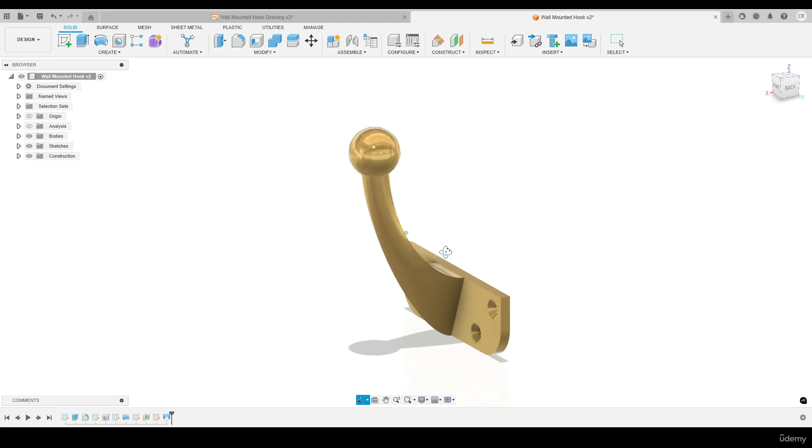In this exercise, we will model this wall-mounted hook. For the base plate, the sheet metal part, that's very simple, basic extrusion. We can use the hole tool for these countersunks. The sphere on top, very simple, use the revolve tool. But the only difficulty is the arm, and for this we're going to be using the loft tool.

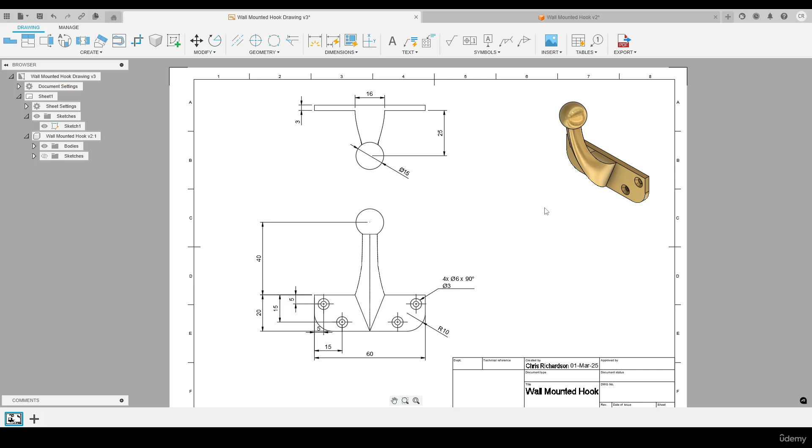If you want to have a go at modeling this part yourself, I've created a drawing for this with the dimensions here, so feel free to capture this and have a go yourself. But for the remainder of this lecture, I'm going to model up this part.

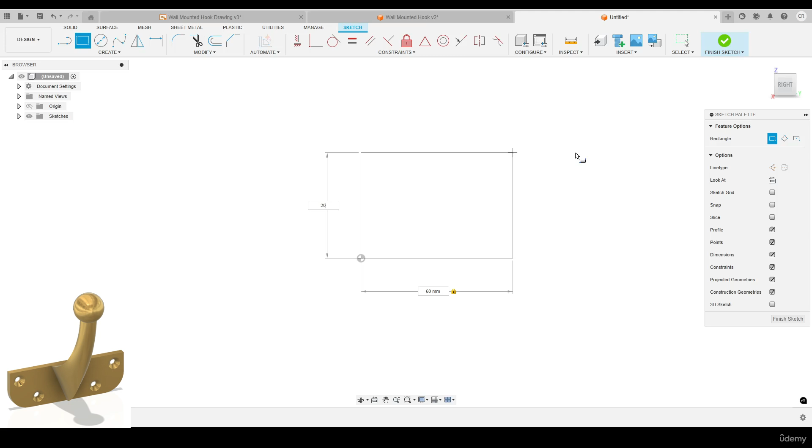Let's go on a new design. First we'll start off with the base plate. That's it, R on the keyboard, rectangle tool, and let's go for the YZ plane, that's the most logical for this part. Start at the origin and let's drag that out. Width of the part, we've got 60. Tab on the keyboard and the height, we've got 20. Just enter.

Let's go ahead, press E on the keyboard, let's extrude this. Let's come out in this direction - definitely not by that much, let's go for 3 mil. Press enter, and let's hit F on the keyboard.

Let's put in our fillets on this edge here, and we also want this edge here. Those fillets have a radius of 10. Okay, looking good. Just going to turn off the edges - visual style, shaded with edges.

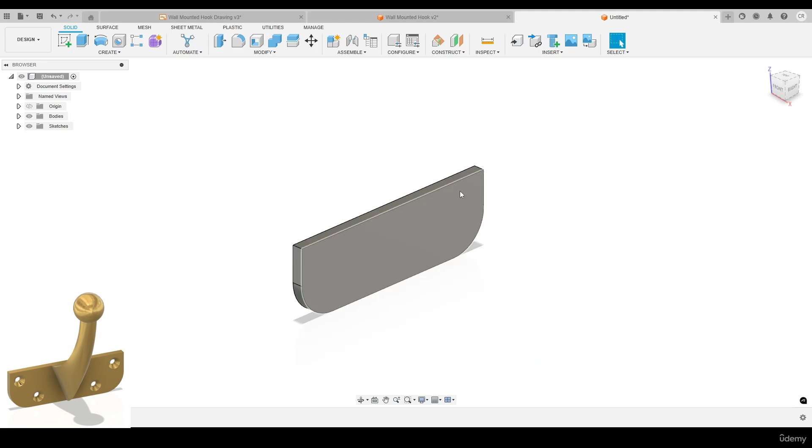Now let's go ahead and put in some points, and we use the hole command to put the countersunks in. So let's create a sketch and we'll do them on this face here. Let's come to create, point, and let's put in these roughly 1, 2, 3, 4, something like that. Use the horizontal constraint between these two and horizontal between these two as well.

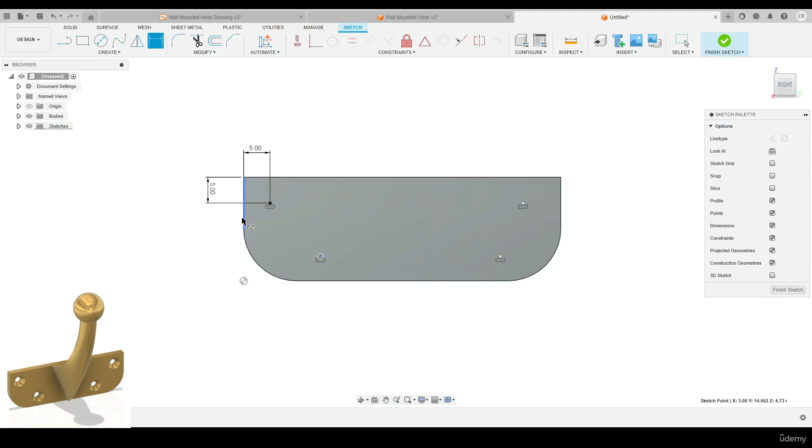Let's go ahead and press D on the keyboard. Let's come from the center point of the first hole to the top horizontal line, that's 5 mil. And then we've got the center point there to this line here, which is also 5 mil. And this one here to this one, 15. And this one from the top here is also 15.

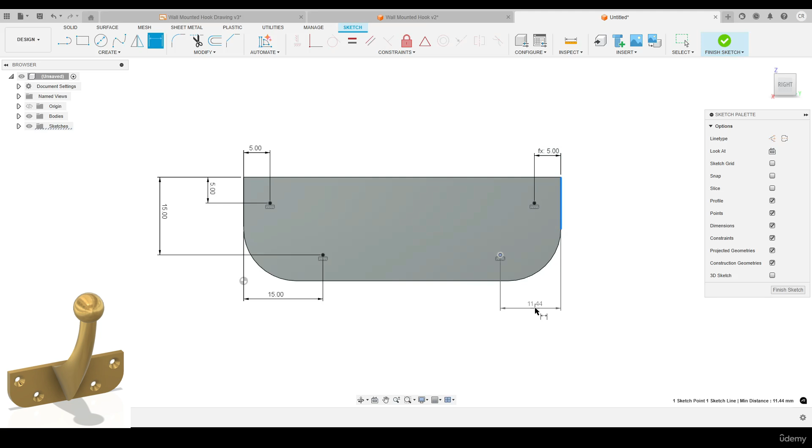Could mirror those across, but in this case I'm just going to add the one dimension. So instead of entering a value in the parameter box, I'm just going to select this dimension here, so if we do change it, that change will be reflected in the opposing one as well. Likewise, going to do the same for this guy. Select 15, enter, that's fully constrained.

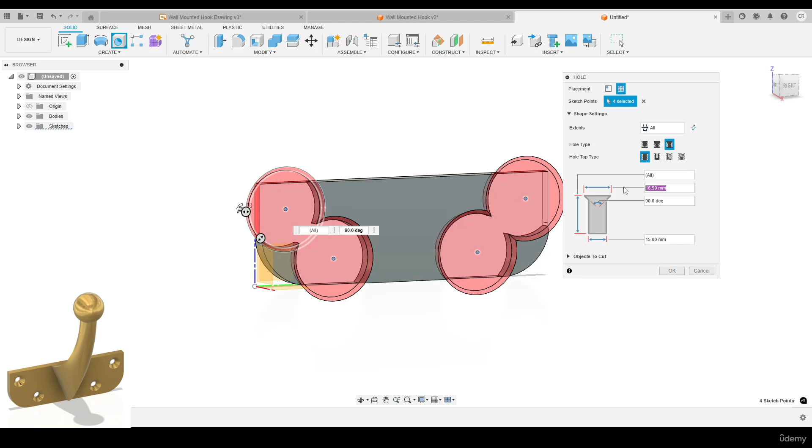Let's finish that sketch, use the hole tool and make sure we have multi-hole selected. Going in for 1, 2, 3, 4. Okay, those holes are particularly big. In terms of distance, we're definitely going through all. Want to go for a countersunk, and we just want a simple hole. So as per the drawing, we've got 4 holes, the countersunk is 6 mil, angle is 90, and the diameter of the hole is 3 mil. Press enter, that's looking pretty good.

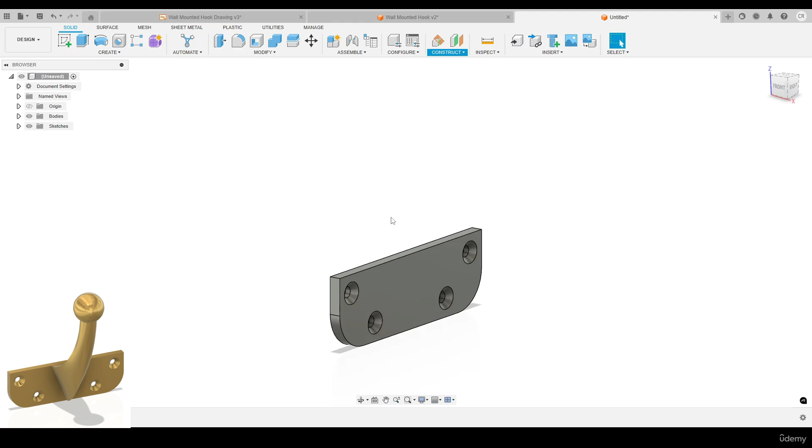Now let's go ahead and add in the sphere, which will be sitting somewhere up here. So we don't have a sketch plane up there currently, we're going to have to insert one. To do this, I'm going to select a mid plane between this face here and this face. Okay, I'm going to press OK there. Just bring this up roughly so we can see.

Looking good. Let's go for C on the keyboard, circle tool, and we'll select the plane that we drew. I'm just going to draw in the sphere here, so it's got a diameter of 15 mil.

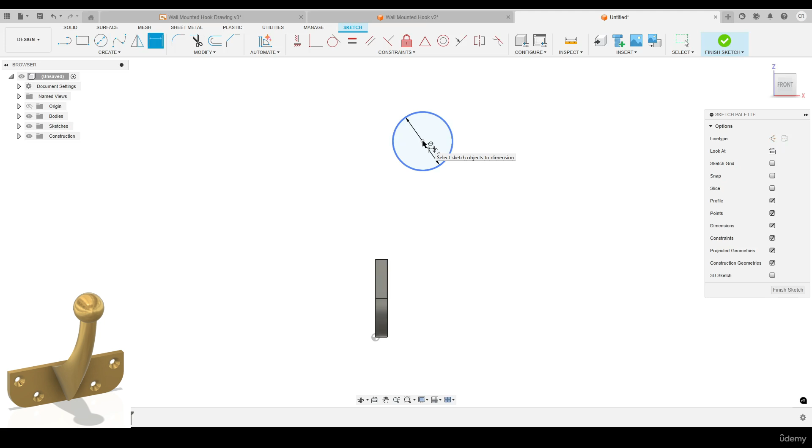Hit D on the keyboard and let's position this. So we know that the center point to this corner point here, that's got a dimension, it's 25. Then we've got a height of 40, and that's also from this corner point here, it's 40. Okay, it's looking nice.

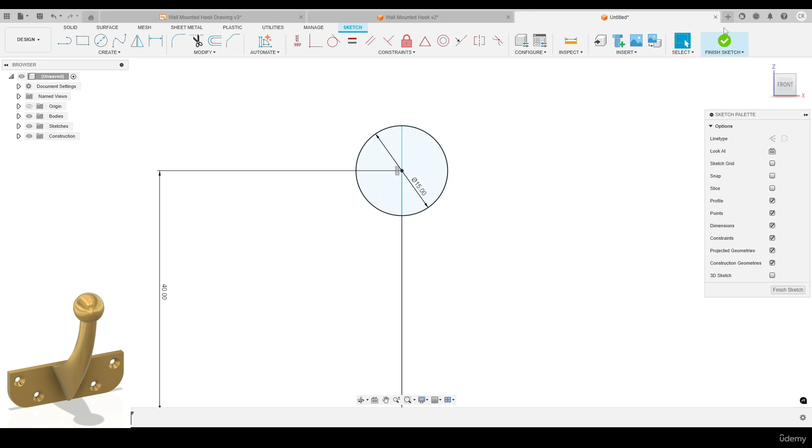Let's go for the line tool then, so we can select a revolution line. Okay, I'm going to put in a straight line there from the top quadrant. So let's finish that sketch. Let's go on the revolve tool, select one of these profiles here, and under the axis we'll select that line we drew in. Press OK.

So there we've got our sphere and our wall-mounted bracket. We just need to put in this arm, so I'm going to use the loft command for this. I need to draw 2 profiles, one on this face here, and then one somewhere within this sphere. So let's go for the line tool then.

Press L on the keyboard and we'll sketch on this face here. I'm just going to roughly draw in a triangle. Okay, something like that, and that should be a complete profile.

That's good. Let's go on the dimension tool between these 2 points here, and that's got a dimension of 16 mil. I want these 2 lines to be the same, so I'm going to use the equal constraint between these 2 lines.

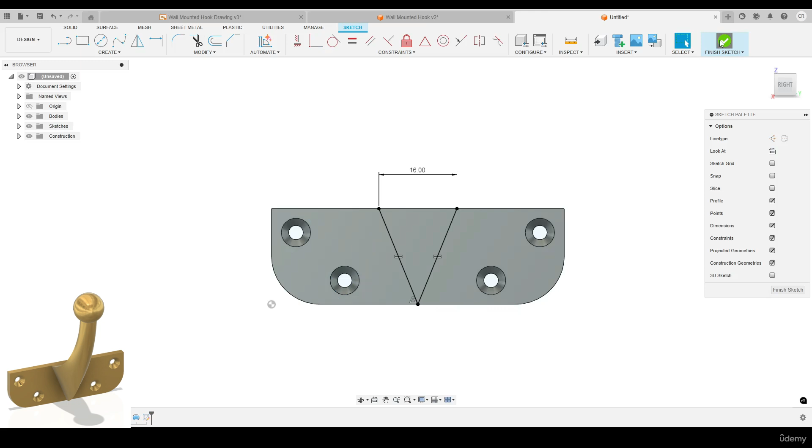That's looking nice, and now we just need to define where this goes, so let's use the coincident constraint, and this point here. If we can find the midpoint line by holding down Shift, it's just there. That's perfect, that's fully constrained. Let's finish that sketch, so that's one of our profiles there.

And then we just need to insert the other profile, which will be in the center here. So to do this, we need a plane to draw on in the center of this sphere.

So let's go and construct and offset a plane. Let's select this face here, we can bring that plane up, and that's got a distance as per the drawing. It's 40 mil, let's enter.

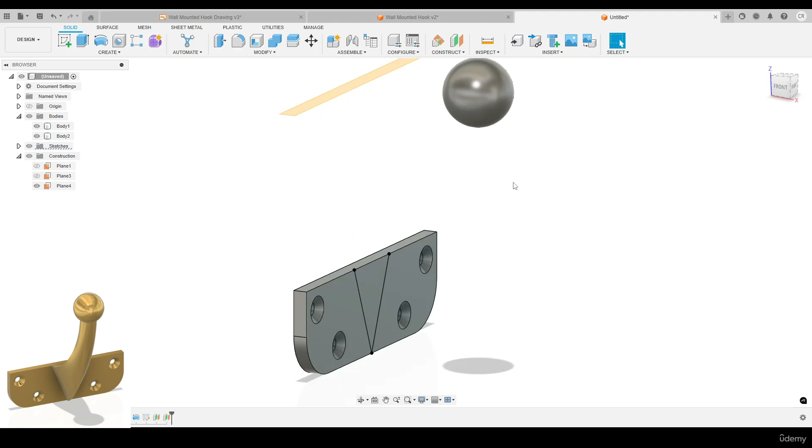Let's make sure that does intersect where we want it to. Go on the front view. Yeah, perfect. All right, let's get a sketch on this plane then.

So let's go and create sketch, let's select this plane here, and I want to project this sphere onto that plane. Let's hit P on the keyboard then.

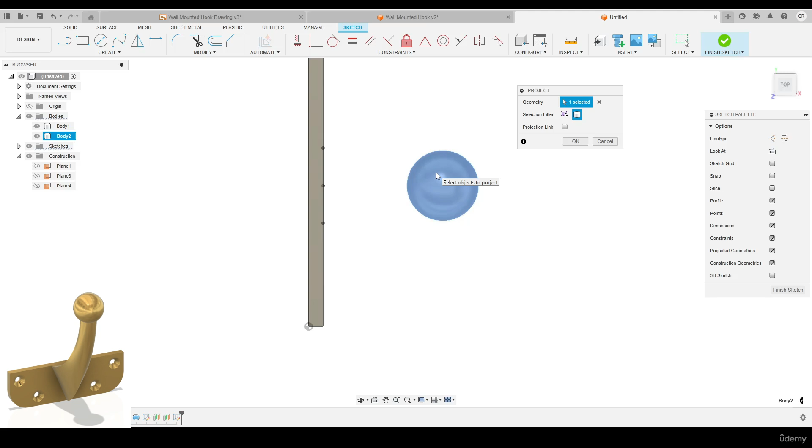In terms of geometry, we want to make sure here that we have body selected, because this is a different body from this one. We know that from the two bodies in the bodies folder. So make sure we have body selected, select this body here, press OK, and we should have a center point there, and also the exterior of the sphere has been projected. That's great, we can see it there.

Let's go for the circle tool then, and let's start at the center of this circle, and let's bring this out. I'm just going to go for 8 mil, but feel free to adjust this how you like, I just chose 8 mil. And that's going to be my profile in the center there, and this one here for the loft command.

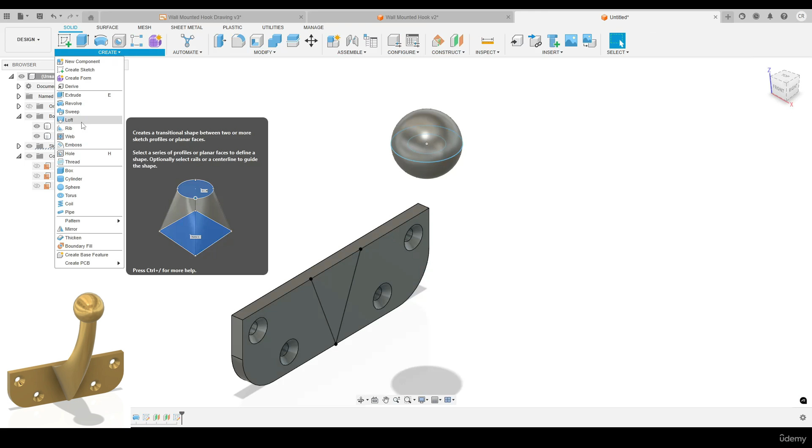Let's go and finish that sketch then. Let's see if this will work. Let's go and create loft. Okay, so we want to select 2 profiles here, let's go 1, let's go 2. All right, interesting, okay, so as in the preview, it's not exactly what we're after.

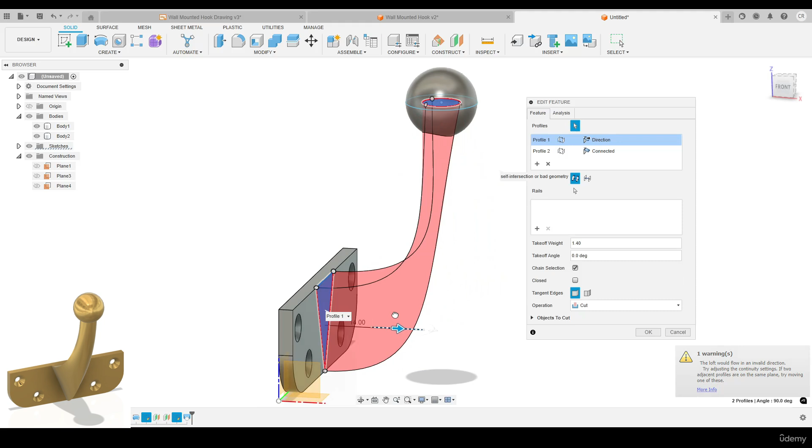So what we can do is just come up to our profiles here. I'm going to change the connected to direction, okay, and then we can adjust that. All right, so we can do something funky like this, I'm going to bring that out roughly like so.

Let's go with direction on the second profile as well. Okay, and actually that's looking quite good, but again you can adjust this how we like, so we can move it around. I'm going to go for 10 on the top, and then profile 1, got it as 8 at the minute.

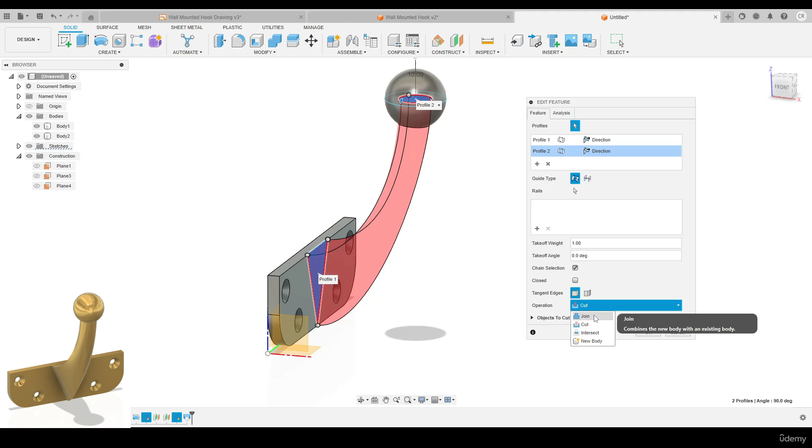Okay, so I'm quite happy with that preview, but right now it's doing a cutting operation, which is not what we want. So let's change that to, let's go for a join. Looking much better, let's press OK. I think that's come out quite nice.

And of course, let's apply an appearance to this. So press A on the keyboard, and for this I chose a brass. So let's go into metal, go into brass, and I went with brass polish.

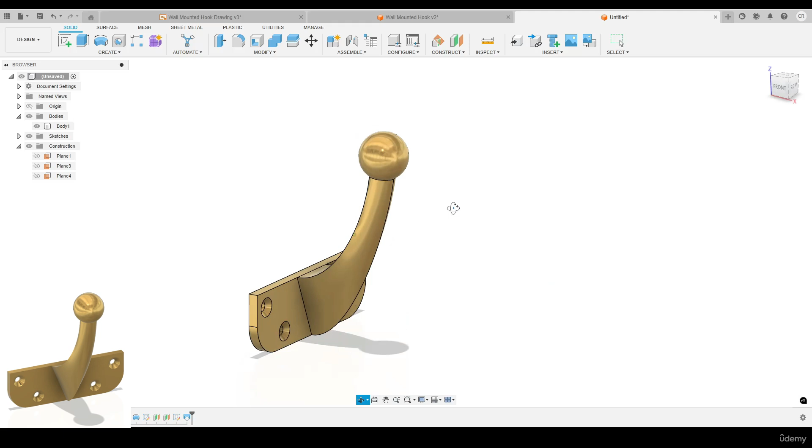So I'm just going to drop this here. That should be on all the bodies, as we can see. Click close there, looking nice. Let's turn off those edges. Visual style shaded, there we have the complete part.

That's looking good. If you managed to do that yourself, especially with the loft command, big well done, and I hope you enjoyed that exercise. And I look forward to seeing you in the next one.